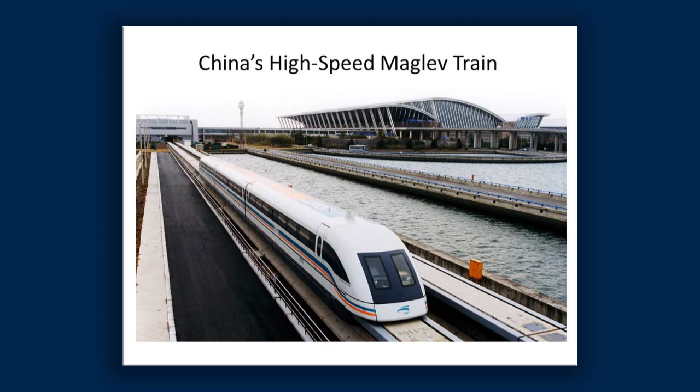This is China's high-speed maglev train. China is the only country in the world with a commercially operating maglev train, the Shanghai maglev. It began operation in 2004 and travels from Pudong Airport in Shanghai. It does 431 kilometres an hour, and has been tested at 501 kilometres an hour, making it the fastest train in the world in commercial operation.

It's only a short track, just 30 kilometres long, but anyone who goes to Shanghai from the international airport will go on it. Maglev has the advantage of a smoother ride—there's no physical contact as with a steel wheel on steel rail train, so it literally hovers above the track with no rolling resistance, making it much quieter.

China is building a maglev train in Beijing, forecast to open in November or December this year. This train won't be as fast because it's based in the city, with stations close together and no distance to build up speed. So the Beijing maglev due to open this year will do probably no more than 100 kilometres an hour, but it'll be much quieter in the city area.

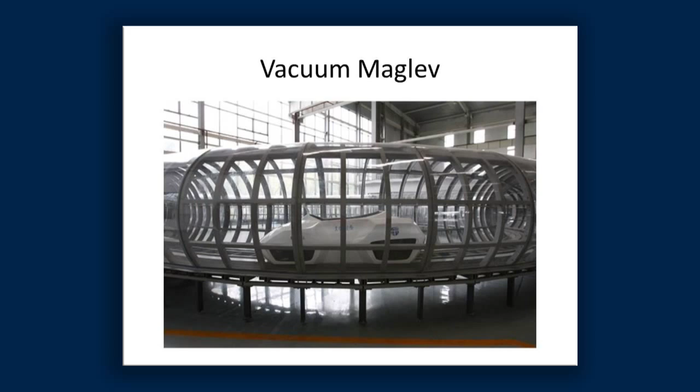You see a picture here of a vacuum maglev test facility. A maglev train's speed in open air is limited by air resistance. Aeroplanes fly at much higher levels where the atmosphere is thin, so there's less air to push through, but a train at ground level faces much more air resistance. There's also a sonic boom issue—if you travel above the speed of sound, you get enormous noise, so it'd be unthinkable to run a train past the speed of sound.

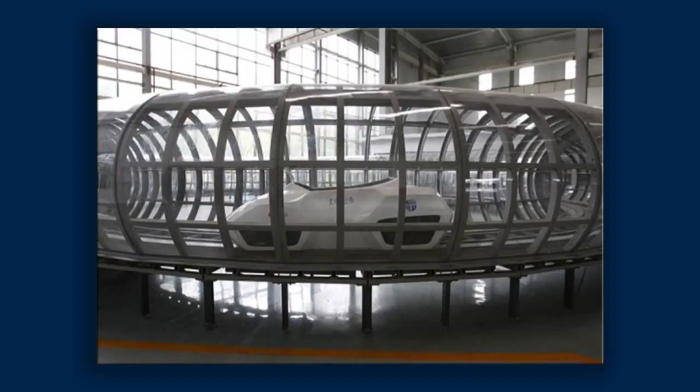The speed of sound is around 1,236 kilometres an hour. To address these problems, Chinese researchers have the world's most advanced facility for vacuum maglev. The picture here shows a tube where the air is sucked out, with a test train running round and round. This one, at Southwest Jiaotong University in China, has the potential to reach a speed of 2,900 kilometres an hour. It doesn't reach that speed currently because of the diameter of the tube—you won't reach those speeds unless you have a long straight tube, but if you built one long enough, you could reach those high speeds, thousands of kilometres an hour.

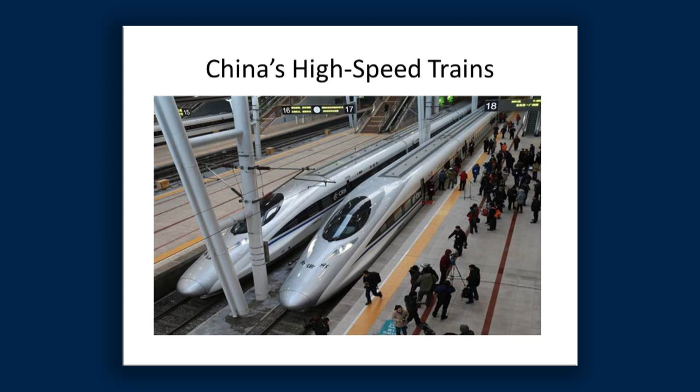Most of China's high-speed trains use steel wheel on steel rail technology. Here we see a couple of typical trains seen all over China nowadays. Rail patronage in China has grown from 128 million trips in 2008 to 672 million trips in 2013, and over 2.9 billion passengers have taken a high-speed train trip between April 2007 and October 1st, 2014.

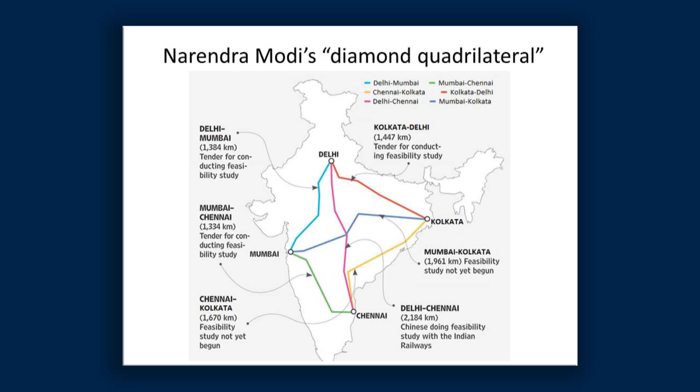China and India are negotiating a $33 billion high-speed rail scheme, the first major improvement in the rail system in India since the British built the railway system in the 19th century. The proposed Delhi-Chennai high-speed rail corridor will traverse close to 2,000 kilometres from the northern capital Delhi to the southeastern city of Chennai. That project is the first one of several crisscrossing the nation.

As you can see, the quadrilateral shape: the cities there, Delhi up the north, Chennai down the south, Mumbai over in the west, Kolkata in the east, and rail links are proposed right across the whole nation. It will be an enormous undertaking and a benefit for both China, who will be helping India build the rails, and of course India itself.

China is building a Mombasa-Nairobi Railway in Kenya that will be extended to 5 countries at a total cost of $13.8 billion. The first phase of the standard rail gauge will cover 609.3 kilometres from the port of Mombasa to Nairobi and will cost $3.8 billion.

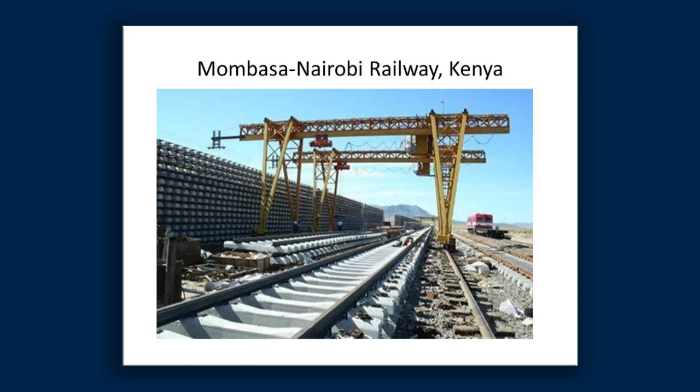90% of the financing will come from the Export-Import Bank of China, while Kenya will cover the remaining 10%. At least 30,000 Kenyans are expected to be employed in the project. As you can see in the picture there, construction is underway.

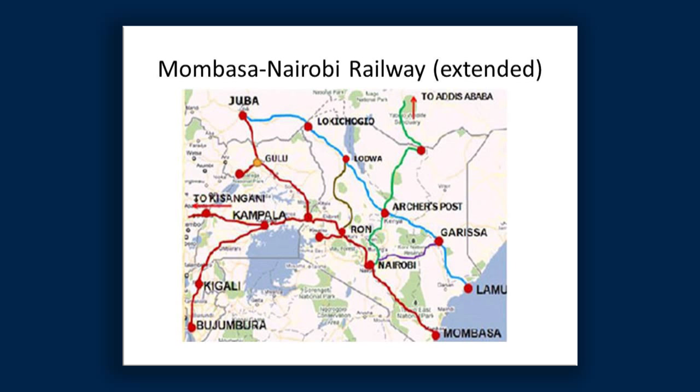That's the same project, the extended version of it. You can see the Mombasa-Nairobi section just in the east of the country, but all the extended rail proposals cover 5 countries: Uganda, Rwanda, Burundi, South Sudan, and the Democratic Republic of the Congo. So it's a proposed railway link much, much bigger than anything we've seen in Africa before.

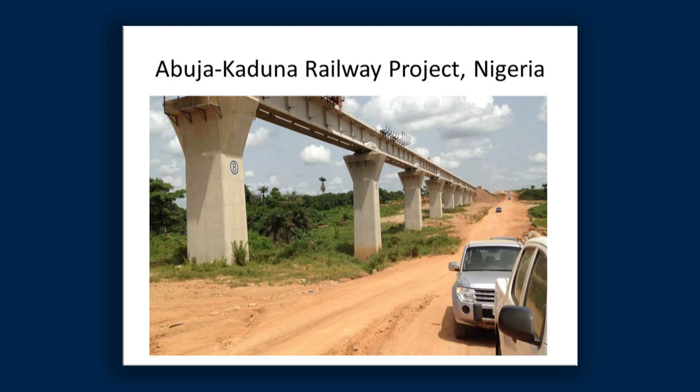Now moving to West Africa. The construction of this rail link is 186.5 kilometres from Abuja to Kaduna. It began in 2011, cost $850 million, and was complete as of early this year. There are 37 overpass bridges, 9 stations along the way, and it was executed by the Chinese rail construction giant China Railway Construction Corporation.

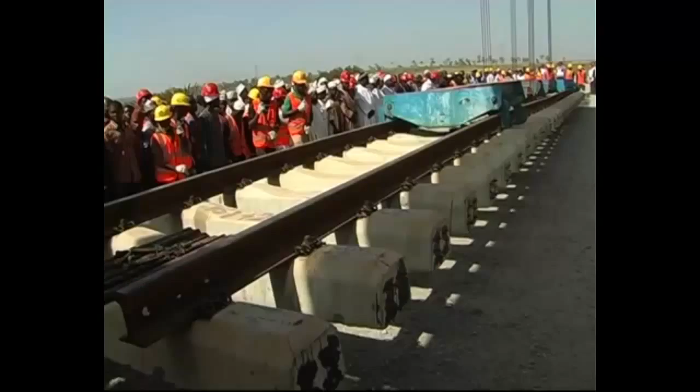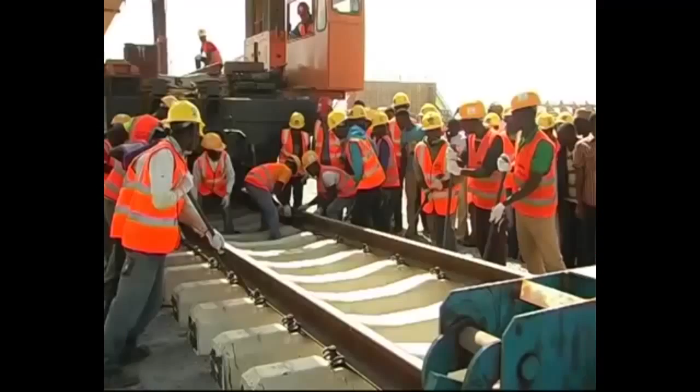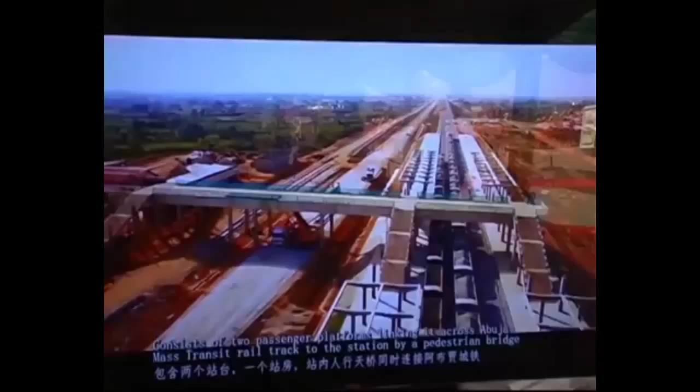This signifies the final track laying for the 186.5 kilometer Abuja-Kaduna standard gauge line, the first of its kind not only in Nigeria but West Africa. The project, which commenced in July 2013, crisscrossing towns and villages, hills and valleys, cutting through rocks as well as rivers and streams, covers 31 rail bridges, 37 overpass bridges, 206 culverts, and 9 stations.

The people of Rigasa are already excited. You can live in Kaduna and then perform your work in Abuja and come back the same day. Some youth will get work loading, different people are going to open their businesses around this area. You have to give thanks to Almighty God for making it possible. So they're very excited, obviously.

And Nigeria has seen the benefit of this rail link, and they already have some massive plans for much more. So, next slide - this is the plan. It's a whole nationwide network. This would be a $13 billion high-speed rail project, financed with China's Export-Import Bank.

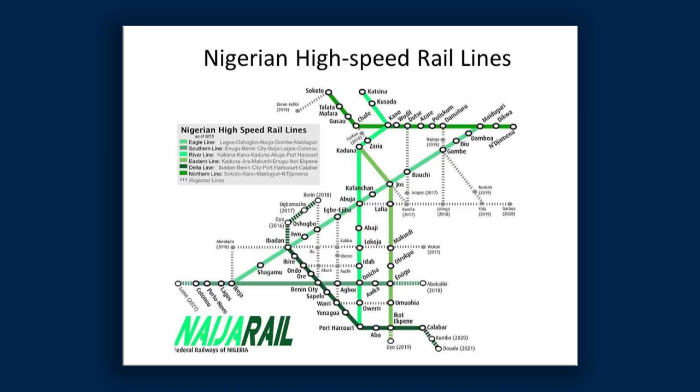The China Railway Construction Corporation is set to build 3,218 kilometres of network across the whole country, and it'll be a major boost to the economy, connecting to cities like Lagos, Kano, Kaduna, Warri, Bauchi, Abuja, and Port Harcourt. The system will be digitally operated using fibre optic cables, radio communication, wireless services, all the latest technology.

The entire network will take 25 years to build, but a lot of the lines will be completed much sooner - certainly less than 50 years, but some will be in just a few years' time. I think Nigeria would be taking over Australia in terms of rail development, the way they're going.

This one, moving to Thailand. The Thai government last year approved a $23 billion transport project that will see 2 high-speed railways link up directly with China, to be done by 2021. At the moment, Thailand only has 250 kilometres of dual-track railway, next to nothing.

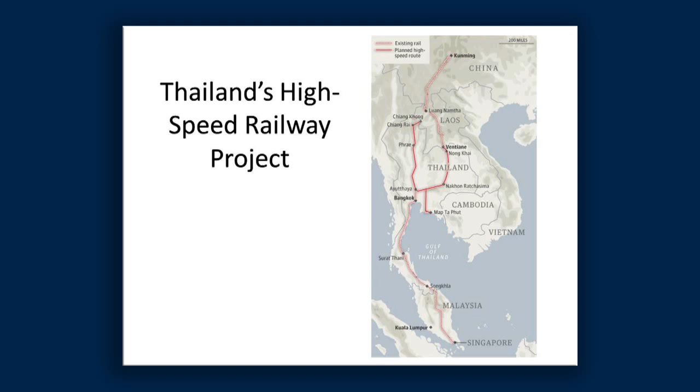China is looking to build a 3,000-kilometre high-speed line from Kunming all the way down to Singapore, passing through Laos, Thailand and Malaysia, a project that would increase China's GDP and those involved nations by $375 billion, as the former Chinese railway chairman told China Daily.

Railway construction in Thailand will begin in September or October at the latest, and it will take around 2.5 years to complete, thanks to a $12 billion investment from China.

Now, I could keep talking about railway projects all day, but I think we're a bit short on time. So I just could not leave out this next project - it's not rail, it's bridges and road. It's a road bridge, an impressive piece of infrastructure: the Jiaozhou Bay Connection Project.

It's supported by 5,238 concrete piles. There are 8 lanes, and it cost 14.8 billion yuan, or $2.3 billion. Construction started in May 2007, took 4 years to build, and employed at least 10,000 people. It officially opened on the 30th of June 2011 for traffic, and the tunnel opened at the same time as the bridge.

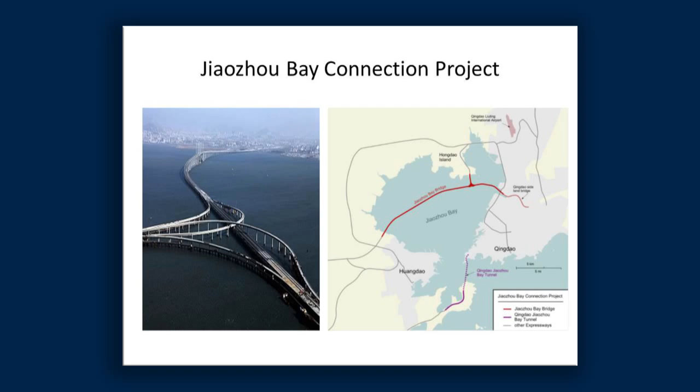Now, that photo you see there, you're only seeing a very small part of it - the section where the bridge goes up to the north, looking in an easterly direction. You're not seeing the biggest length of the bridge over the water, which moves all the way down to the southwest. So you don't get a full sense of the size, but it's nearly 30 kilometres - a massive project, and China would have that sort of vision. It'd be like going across Port Phillip Bay from St Kilda to Werribee.

Okay, we're on the next.

Three Gorges Dam. The Three Gorges Dam is probably the most well-known piece of infrastructure in China. It is massive. The dam is on the Yangtze River. The actual dam has a capacity of 39,300 gigalitres.

This dwarfs Australia's biggest reservoirs. The biggest reservoir in Australia is the combined Lake Gordon, Lake Pedder Reservoir, which together has a capacity of 11,000 gigalitres. Lake Argyle is the second biggest, with a capacity of 10,500 gigalitres. Well, the Three Gorges Dam, remember, is 39,300, so nearly 4 times the size.

The Three Gorges Dam power plant is the biggest power plant in the entire world, with a capacity of 22,500 megawatts. There are 32 turbines, each with a capacity of 700 megawatts. By comparison, Australia's biggest power station, Eraring Power Station in New South Wales, fuelled by black coal, has a capacity of 2,880 megawatts.

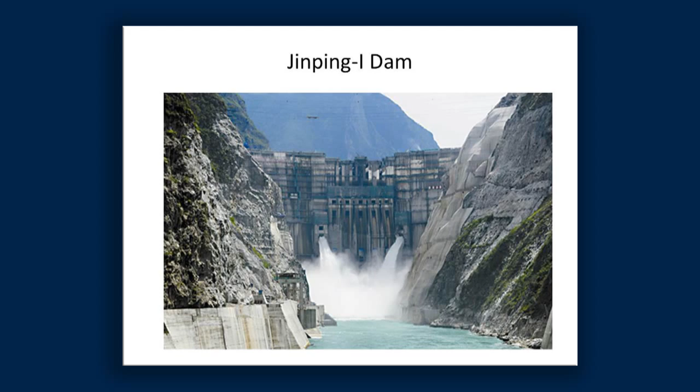Now I want to move to dam building worldwide, because China has more dams than the rest of the world combined, but at the same time China is building a lot of the world's dams in numerous countries. Chinese banks and companies are involved in some 330 dams in 74 countries, particularly in Africa and Southeast Asia.

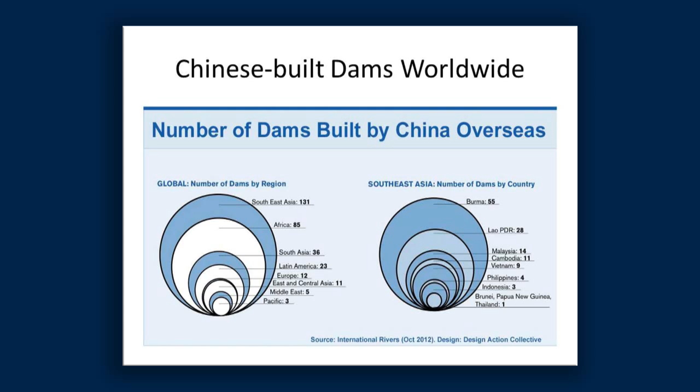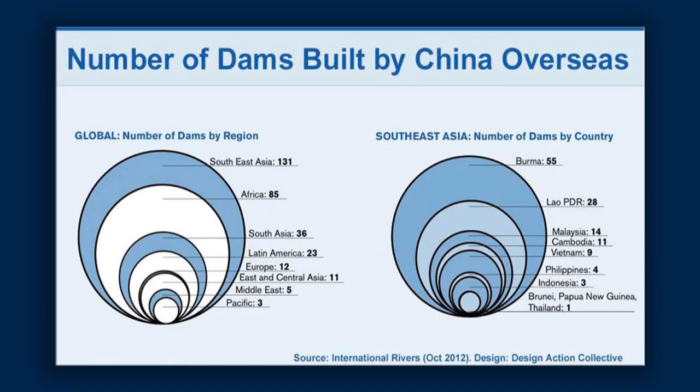This diagram here is a little old - it's from 2012, and a lot can happen in 2.5 years the way China's going. But it illustrates the point. I got it from International Rivers, which is actually an anti-dam, Western-backed environmentalist organisation. They're hysterical about dam building, but I've used a lot of their material - it's actually quite useful. At least they've done something good. They've documented just about every dam in the world that China's building.

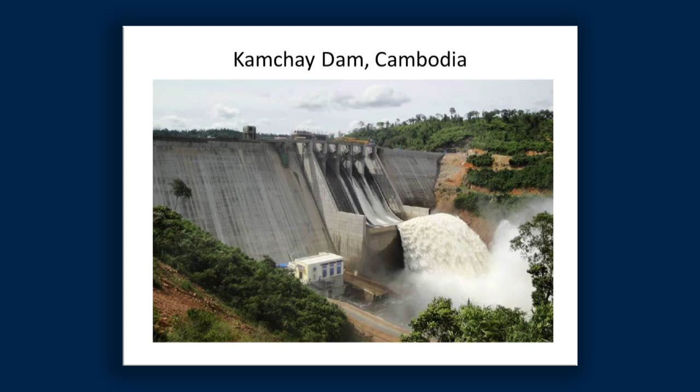This is the Kamchay Dam in Cambodia. I'm just looking at a few specific dams that China's built overseas - we'd be here forever if I went through them all. This particular one was opened in 2011, built with help from the finance from the Export-Import Bank of China. Its output is 193 megawatts, and according to estimates, Cambodia has 10,000 megawatts of hydroelectric power potential. So there are plenty more dams China's planning to build in Cambodia.

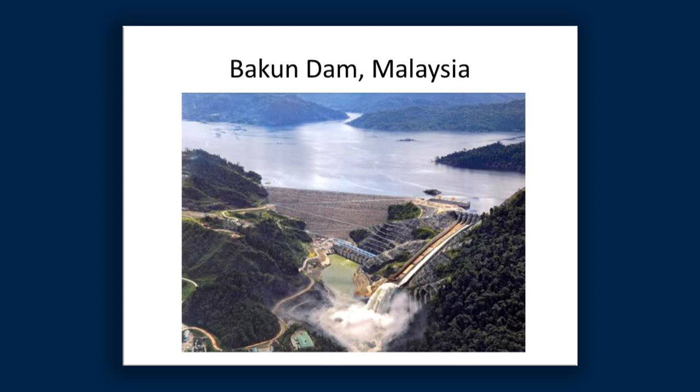Here's a big one. This is Asia's largest dam outside of China, opened in 2011. It's 205 metres high, has 8 Francis-type turbines, and provides a total of 2,400 megawatts of capacity. It was built with help from the China state-owned Sino Hydro and the Export-Import Bank of China.

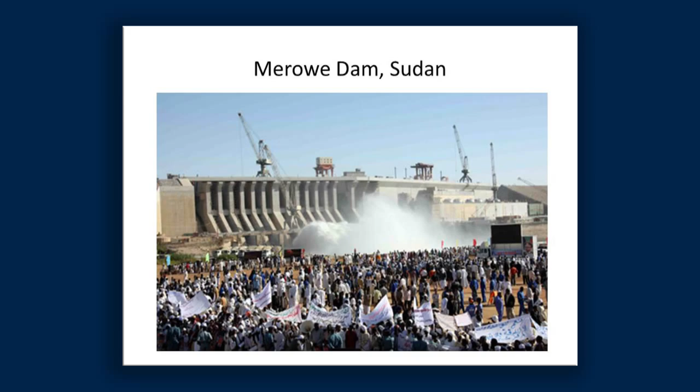This is the Merowe Dam in Sudan. This particular one blocks off the whole Nile River. Construction started in 2004 and it opened on the 3rd of March 2009. The dam is 9 kilometres in length, very long, and 67 metres high. China National Water Resources and Hydropower Engineering Corporation and China International Water and Electric Corporation built the dam. The Export-Import Bank of China contributed €240 million to help finance it. The power station has a 1,250 megawatt capacity.

The Myitsone Dam is still to be completed. This would be the 15th largest hydroelectric power station in the world. The dam is planned to be over a kilometre long - 1.31 kilometres long - 140 metres high, with a planned electric generation capacity of 6,000 megawatts, which is huge.

Just as a comparison, the Snowy Mountains Scheme has 9 power stations, with a combined output of 3,950 megawatts. Well, this one's planned to be 6,000 megawatts, a fair bit bigger, but it hasn't been built yet. Construction has been suspended at the moment - there's been an enormous campaign to stop the dam by Western-backed environmentalist organisations.

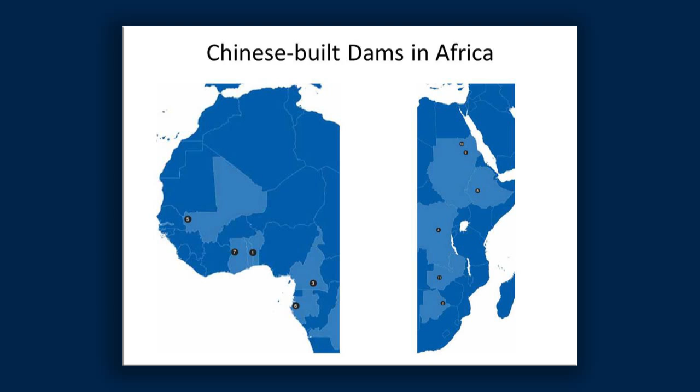Next. Okay, right, nuclear power. This is really essential for China and the world, and whether people like nuclear power or not, it's happening and will happen, and it's happening at a very fast rate of knots.

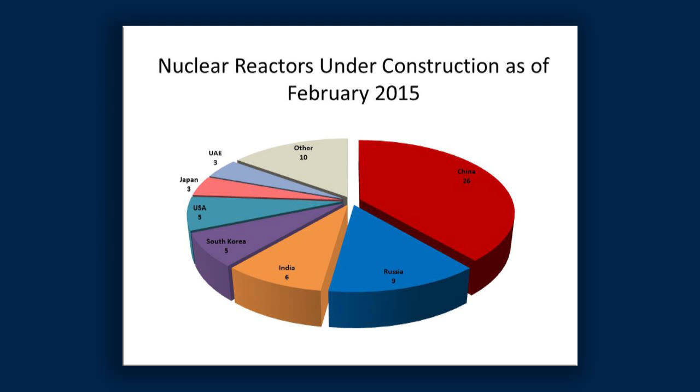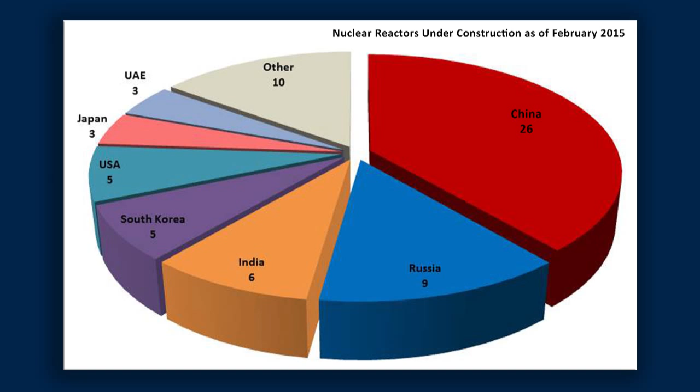Here we have a pie chart. I got the data from the official body of the World Nuclear Association, and this chart shows the reactors currently under construction. This is all about China, but you'll see a few other countries in there, but in all of these China's got the biggest slice of the pie. Here we've got 26 reactors that China is currently building. Russia's got 9, India's got 6, South Korea's got 5. It's the latest data, for February this year. So that's an enormous amount that China has already just under construction.

Reactor construction time from 1992 to 2012 was 5.8 years. The minimum time was 4.3 years. Construction times are becoming shorter. The CPR 1000 takes just 52 months to build, and the smaller modular reactors just take 36 to 40 months. At the current pace of development, China will be number one in nuclear power generation worldwide.

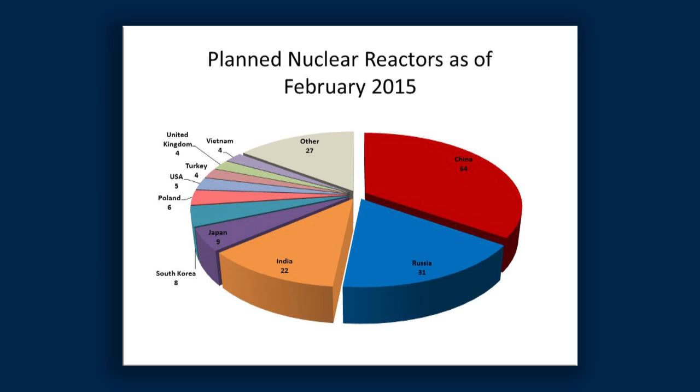At the moment, United States has 99 reactors. China doesn't have that number yet, but we'll go through the next slide and the one after that, you'll see later. This particular one goes through the planned reactors. The definition for planned reactors is approvals, funding or major commitment in place, mostly expected in operation in 8 to 10 years, so it's all locked down that they will happen. The numbers are much bigger than the ones currently under construction. Remember, China had 26 currently under construction; they have 64 planned that will be up and running in 8 to 10 years. Once again China's got the biggest chunk in the whole world. Russia 31, India 22, Japan 9, South Korea 8, Poland 6, the USA 5. Now remember, the USA currently has the most reactors in the world, 99, but at the rate they're going, only building 5, China is going to overtake them very, very soon.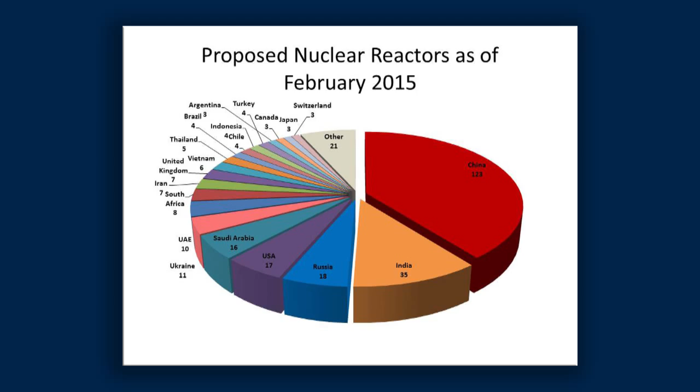And next, and I think this particular one really shows why, because this is proposed nuclear reactors. The definition for proposed is specific program or site proposals, so there's specific proposals, but they don't have the finance in place, though most likely they will. The way the financing is happening with China's intention of growth, we can see that these will happen, or at least most of them. The definition is specific program or site proposals, expected operation mostly within 15 years. Here the numbers are much bigger: China, 123 proposed nuclear reactors. Now at the moment United States has 99. So with the ones they currently have, plus the ones under construction, plus the planned ones, plus the proposed ones, China will really eclipse the US nuclear capability. And of course, notice the BRICS countries in there, India, Russia, and other BRICS as well. All BRICS countries are working with nuclear power, and China is building nuclear reactors overseas. So next.

On her Twitter, she said that the 4th and the 5th nuclear plant require an investment of $5.8 billion and $7 billion respectively. Argentina already has 3 nuclear power stations that use German and Canadian technology, so now they're moving towards Chinese technology.